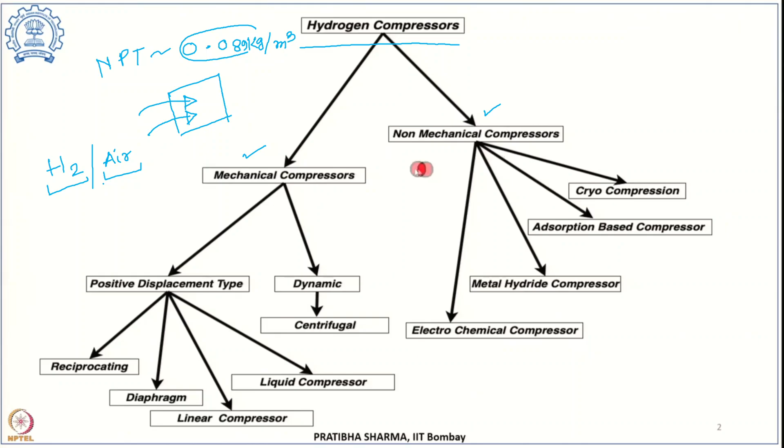There is a difference between the hydrogen compressor and air compressor. What are the main challenges between them? You know that air has a much higher density than hydrogen. Hydrogen has a very low density, while air has comparatively higher density.

And the diffusion rate of hydrogen is very high, while the diffusion rate of air is less compared to hydrogen. If the diffusion rate is very high for hydrogen, we have to take extra care for compressing it, because it should be properly sealed. Otherwise hydrogen can easily diffuse.

Rather, we will lose hydrogen. So we have to develop a totally sealed system, or hermetically sealed system, such that when you are developing a compressor unit like a positive displacement type reciprocating compressor, the material and all sealing components should be extra careful, such that no hydrogen leakage occurs. But air is easy to compress, and leaking of air is less than hydrogen.

And as you know, hydrogen is a very explosive gas. As we compress hydrogen, its temperature will be high, the pressure will be high, and correspondingly the temperature will be high. As it is a very explosive gas, the ignition probability is very high, that's why you should have extra care.

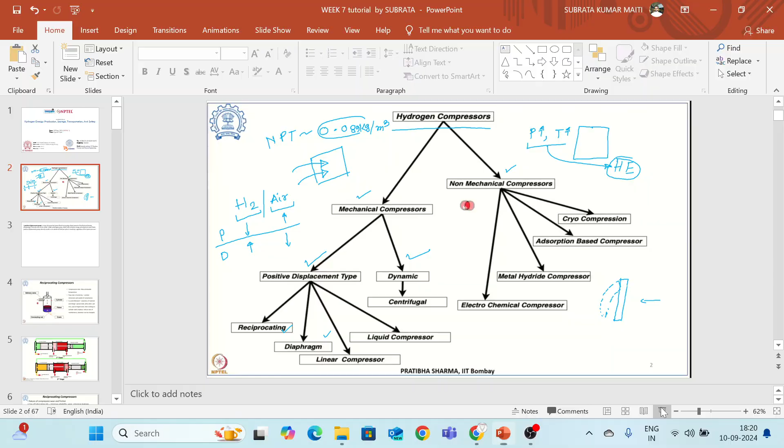Then coming to the, just wait, some other students... I always prefer the students to join at the proper time or scheduled time. Otherwise, it's a bit difficult to manage. Okay, anyway. Okay.

Next is the linear compressor. Some sort of advantages are there for the linear compressor. The reciprocating compressor is very noisy and a very vibrating system, and its compression efficiency is lower than the liquid compressor. And the contamination of oil, different sorts of oil used in the reciprocating compressor. Just to avoid these sorts of contaminations and avoid noise and vibrations, the linear compressor and liquid compressor have been developed.

Next is the dynamic compressor. Under the dynamic compressor, the centrifugal compressor. The centrifugal compressor is the same arrangement as the centrifugal pump, the pump used for taking the water from the ground floor to above. This is called a centrifugal pump. It is used for carrying the water from the ground floor to the first floor, second floor, third floor, or to the water tank kept up. This sort of centrifugal compressor is also used for hydrogen compression.

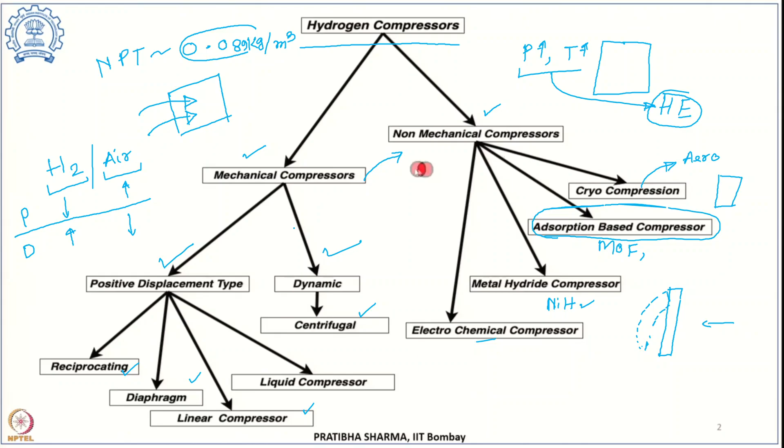Firstly, we will discuss the positive displacement type. Before coming to the positive displacement type, you should know some basic systems. I think most of you know the piston cylinder arrangement. This is the cylinder, and this is the piston, and this is the connecting rod.

And the connecting rod is connected with the crank and crankshaft. This is the crank. The crank has a rotary motion, and this connecting rod has a linear motion.

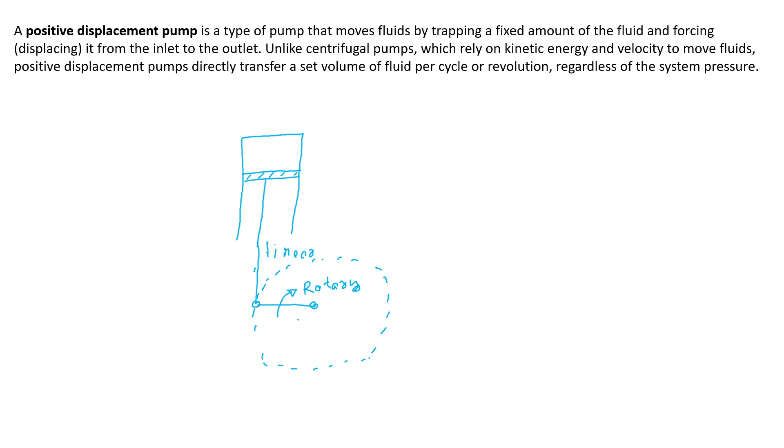And this is the center of the circle. Suppose in that path, the crank will rotate in the rotary motion. Okay. This is called crank, CRANK, crank. When the crank is rotating in this path, then this connecting rod, this is connecting rod.

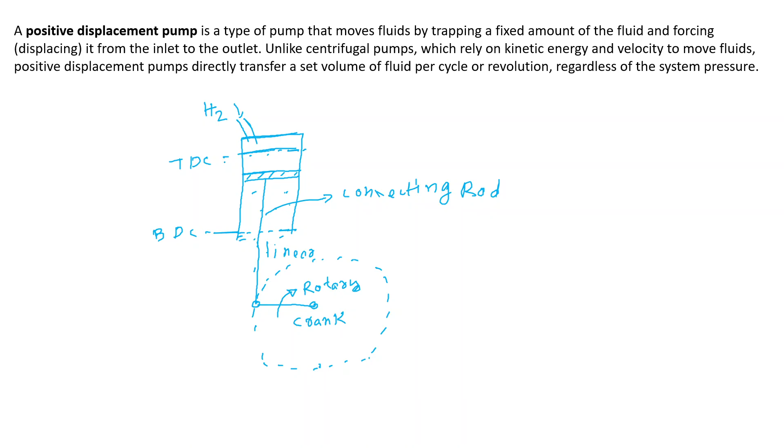When the piston comes to the bottom dead center in that position, the intake of the hydrogen will occur. That means when the piston comes to the bottom dead center, the hydrogen will be taken into the cylinder. The whole cylinder will be filled up with hydrogen gas. When the piston goes upward, it will come to the top dead center. The hydrogen gas will be compressed, and after that, the compressed hydrogen gas will go out.

This is the outlet of compressed hydrogen gas, or hydrogen gas with high pressure. Compressed gas with high pressure. This is why this is a positive displacement type thing. Anyone of you know why this is called positive displacement pump? Piston cylinder arrangement or reciprocating pump is called the positive displacement pump. Why? Because the answer is here.

What is the definition of the positive displacement pump? The positive displacement pump is a type of pump that moves fluid by trapping a fixed amount of fluid or displacing it from the inlet to the outlet. That means for each cycle some volume of hydrogen will be compressed. By adding a large number of cycles, a large amount of hydrogen will be compressed. One by one cycle, the hydrogen gas or air will be compressed. This sort of process is called positive displacement pump.

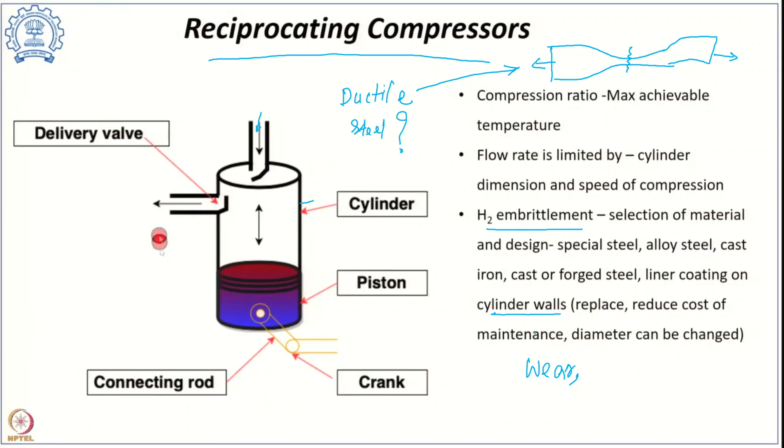Before coming to that part, I will discuss the connecting rod. This connecting rod has a linear motion. These two connecting rods are like this, in this way. My pen is somewhat disturbing.

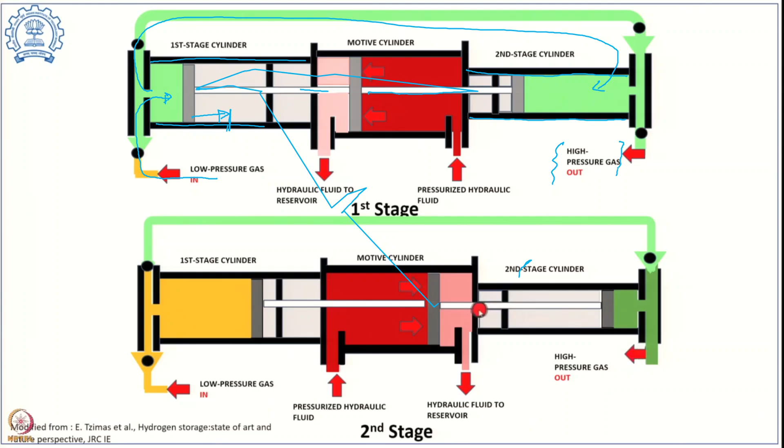The compressed hydrogen of the first stage cylinder will come to the second stage cylinder, and the second stage cylinder will produce higher pressure hydrogen gas, which will be stored for future applications. This is the way of multi-stage operation. In this way, a large number of cylinders can be accommodated for getting higher pressure or higher compressed hydrogen.

What are the challenges? Challenges we have already discussed: the nature of compression, wear and friction during the piston cylinder movement, as the piston is moving to and fro, up and downward. The wear and friction will corrode or erode the material, and the cylinder and the pistons will be damaged.

That's why lubrication or lubricating oil will be used to improve the reliability, minimize the wear and the leakage, and the life will be more. This is a very simple thing.

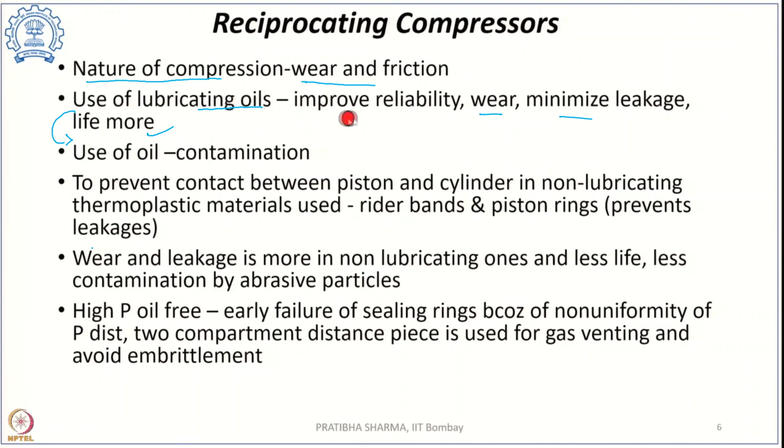The use of the oil has some disadvantages also, like contamination. If the oil contaminates the compressed hydrogen, you will get contaminated compressed hydrogen. For that you have to arrange another unit so that the oil can be removed from the compressed hydrogen. These sorts of challenges you have to take care of during hydrogen compression.

Here is some theory part. Wide range of capacity and flow rate, and the delivery pressure is very high. This reciprocating compressor has up to 1000 normal meter cube per hour flow rate. The company Hydropac has developed a compressor with a flow rate of 4820 normal meter cube per hour.

Hitachi Infrastructure is also a reciprocating compressor manufacturer. These are very simple things you can go through. These are the several challenges, like several moving parts associated with the reciprocating compressor.

So as a large number of moving parts are associated with the reciprocating compressor, the maintenance cost is very high. A large number of moving parts means that the complexity of the system is very high, so the maintenance cost is very high. And you have to arrange some cooling arrangement, since during compression the temperature will be high. That high heat should be extracted, otherwise this hydrogen can be explosive.

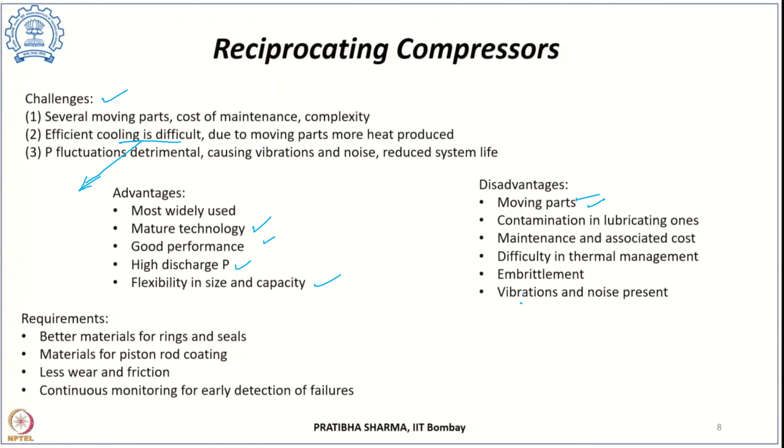And the thermal management, like arranging the heat exchanger, is very difficult, and embrittlement of the piston cylinder material is there. So to avoid embrittlement, you have to take care of the material design. And last but not least, vibration and noise are present in the reciprocating compressor. To minimize these vibrations and noise, and to eliminate the contamination of the oil, the diaphragm compressor has been developed.

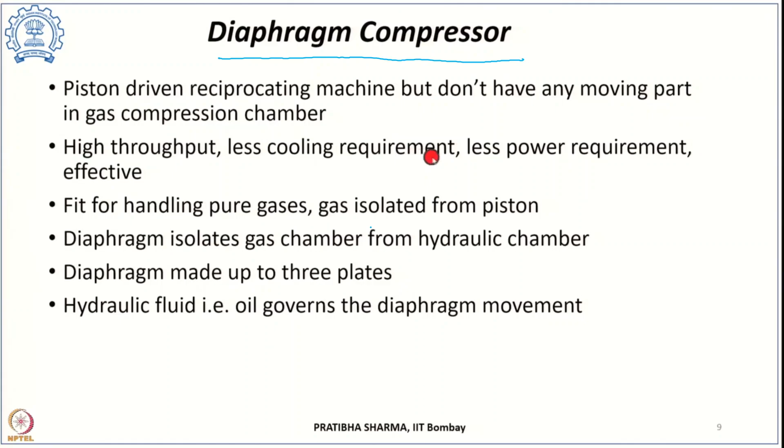This is simple. You can go through this slide; I will not go through it. I will come to the working principle of the diaphragm compressor. Okay. What are the advantages of the diaphragm compressor? The diaphragm compressor is an oil-free hydrogen compressor. You get oil-free, lubricant-free compressed hydrogen gas. There is no oil contamination in the hydrogen.

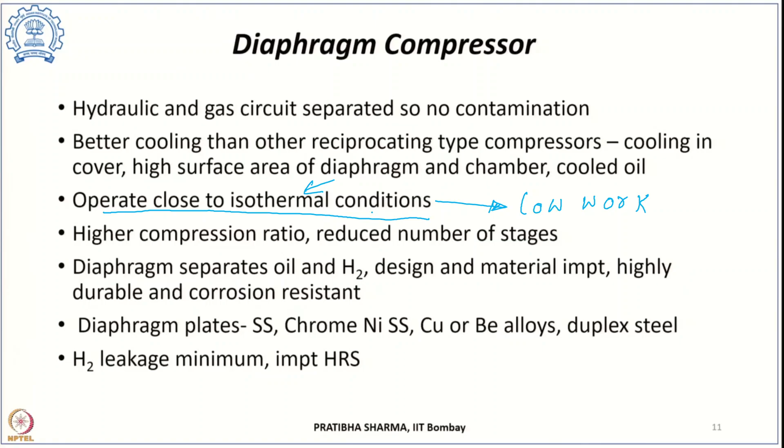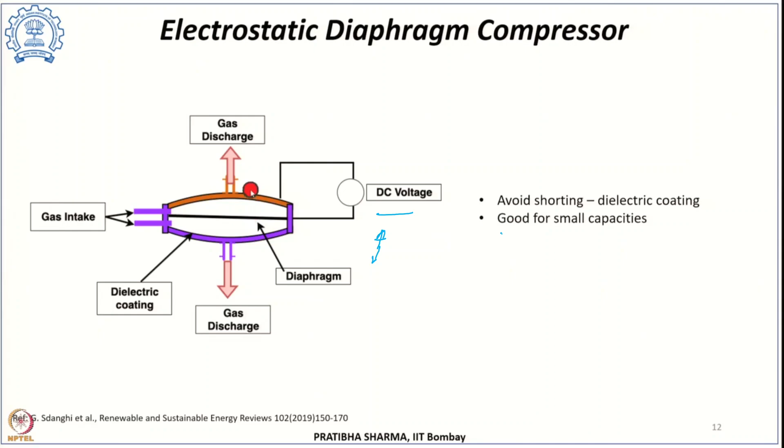This is the electrostatic diaphragm compressor. There the DC voltage is used just to give the to and fro motions to the diaphragm. That's why it is called the electrostatic diaphragm compressor. Okay, this is good for small capacity or small scale industry, or small amounts of hydrogen compression.

There are some advantages. It has high efficiency, it is very compact, high throughput, lower power consumption, less cooling requirement, and fit for handling pure gases, as there is no contamination with the oil. Some disadvantages also: the failure of the diaphragm, so the diaphragm material should be taken into consideration. Complexity is a little bit higher, and there are flow rate limitations; the flow rate is not so high, but the flow rate is high for the reciprocating compressor.

Some sort of status here you can go through. These are the companies producing this sort of compressor, 4 to 28 megapascal, and flow rate is 5 to 581 normal meter cube per hour.

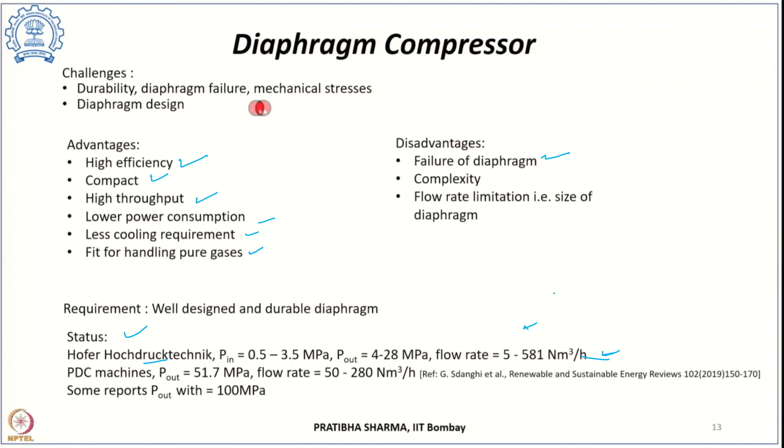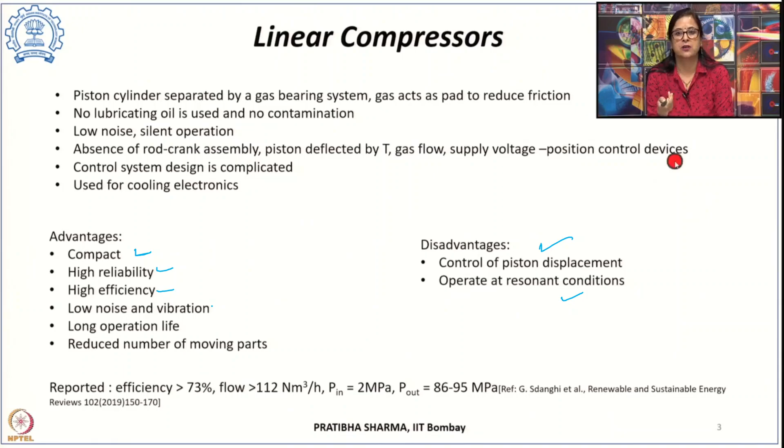We have to employ a large number of sensors, such that they can sense temperature and pressure of the gas, and according to this the magnet positions will be fixed. The control of the piston displacement operating at resonant conditions; these are the main disadvantages. The advantages: it is very compact, high reliability, high efficiency, low noise and vibrations because of the spring arrangement systems, and long operation life.

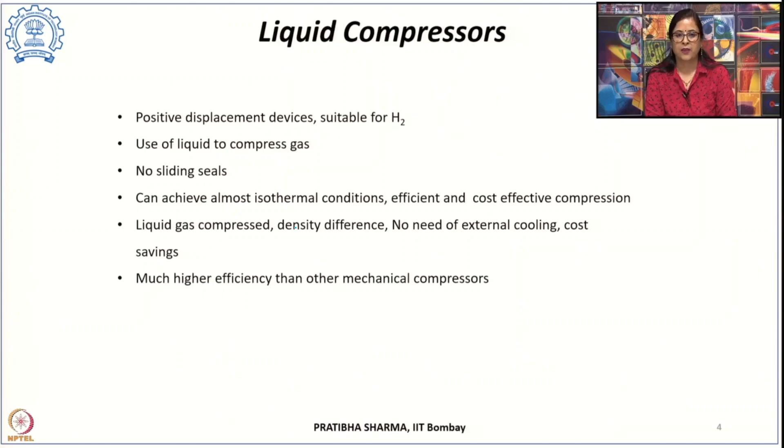Next, the liquid compressor. The liquid compressor also compresses using a positive displacement device. These are the very basic things you can go through. Now coming to the working principle of liquid compression. Generally, the word liquid compression is a little confusing. Why is the word a little confusing? Because suppose liquid means you take water. Is it possible to compress water? Can you compress the water? No.

Sometimes, during solving fluid mechanics problems, we assume water as an incompressible fluid. We have solved different numericals assuming water as an incompressible fluid. But water also can be compressed at a very low level. All liquids can be compressible at a low level. So liquid hydrogen also can be compressed.

Here, two piston cylinder arrangements are there. At the inlet, a liquid pump is used. This pumping liquid is another liquid. This piston will initially go downward, the hydrogen inlet will come, and the compressed hydrogen will go to the next cylinder, where further compression is done, and we will get higher compressed hydrogen.

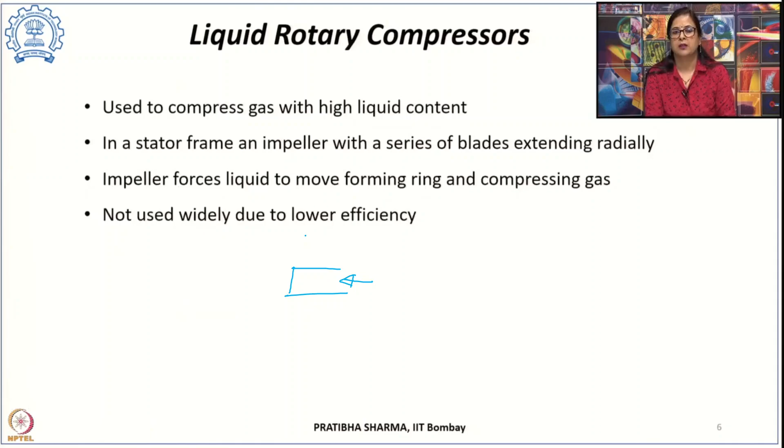This is the liquid rotary compressor, used to compress gas with high liquid content. In the piston cylinder or reciprocating compressor, a fixed amount of gas is compressed, but in the rotary compressor, a larger amount of gas will be compressed, or at a continuous stage.

Then the ionic liquid compressor. In place of liquid, here we will use the ionic liquid. What are the advantages of the ionic liquid?

Because the ionic liquid has a low melting point, low melting point means low vapor pressure. If the low vapor pressure of such liquid is used for compressing the hydrogen gas, the loss of the liquid will be very less.

Loss of the liquid will be very less means that during the continuous operations or long term operations, as the vapor pressure is low for the ionic liquid, it will not evaporate easily. If the vapor pressure is low, it will not easily evaporate, which means the loss of the liquid will be less.

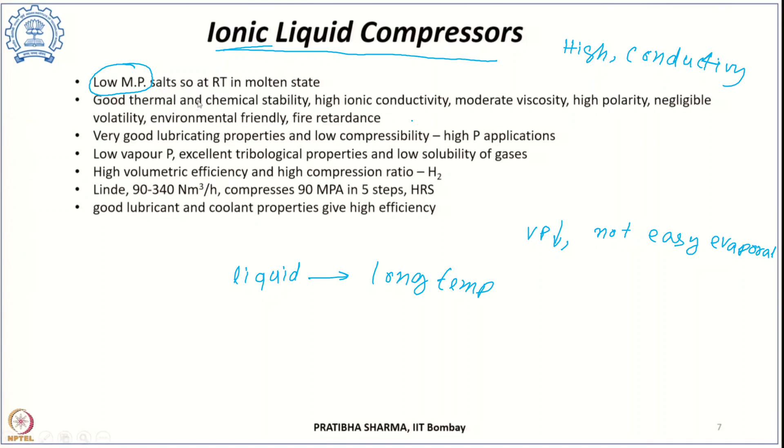No contaminations - these are the advantages you can go through. The main disadvantage of this ionic liquid is the corrosion is very high, because as ionic liquid conditions are used, it can chemically corrode the systems. So corrosion is very high, and you have to take care of the material design for the ionic liquid compression.

And cavitation phenomena - these are the main things. Summary you can go through.

Next is the cryogenic compression. Cryogenic means low temperature. Sometimes at low temperature, the state will be liquid.

The liquid hydrogen at cryogenic conditions, means at very low temperature at 77 Kelvin, the hydrogen will be at liquid state. This liquid hydrogen will be delivered through the cryogenic pump to the evaporator.

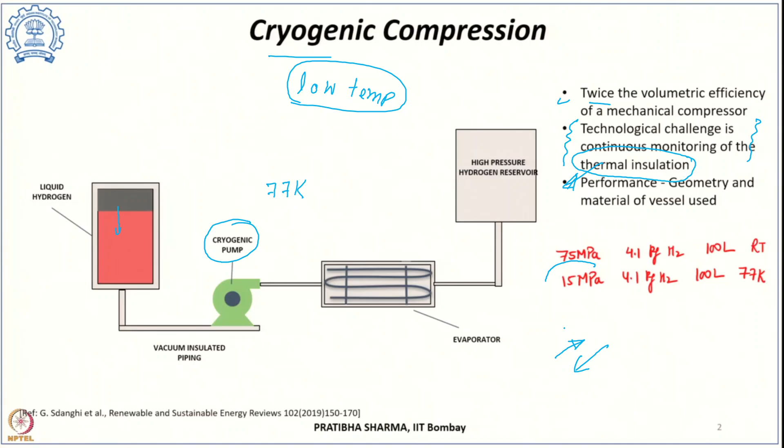The technological challenge is continuous monitoring of the thermal insulation. The working principle of this cryogenic compressor is thermal arrangement - sometimes heat is absorbed, sometimes heat is released. In this process, the cryogenic compression works.

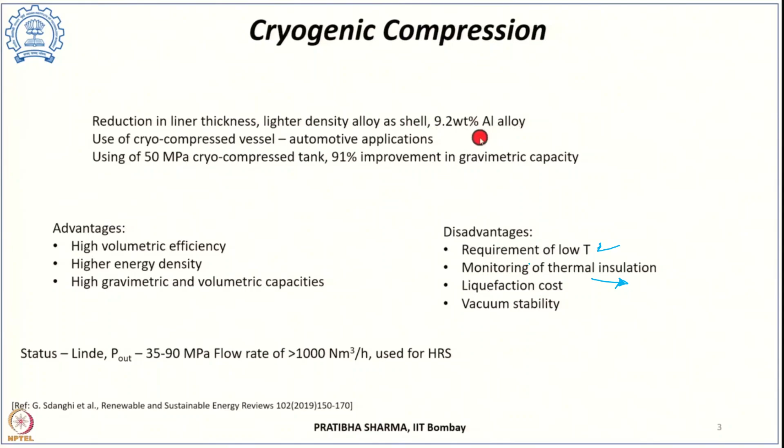It requires low temperature. Just to maintain or create this low temperature, you have to pay a higher amount of money, so the maintenance is very high - monitoring the thermal insulation, as the working principle is on the thermal basis. So proper thermal insulation should be there.

Next is the metal hydride compressor. I am getting very late, so I'll go in very speed.

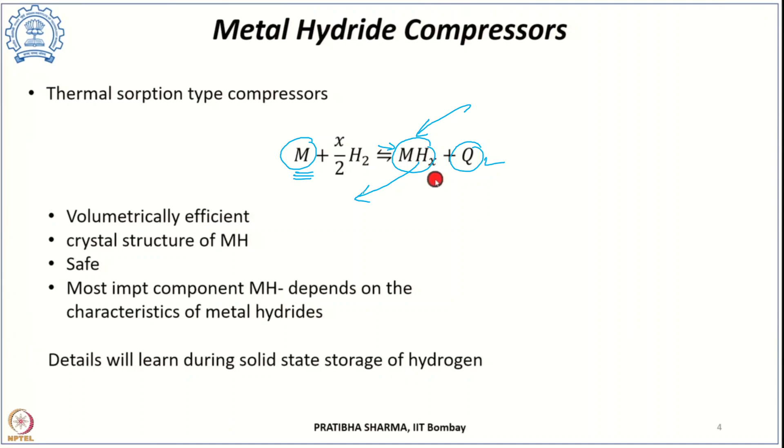Metal hydride compressor - suppose nickel, any sort of metal will react with the hydrogen and form metal hydride, meaning the hydrogen is storing inside the metal interstitial. During the forward reaction, heat is produced, meaning this is an exothermic process. During the releasing of the hydrogen from the metal, the backward reaction is endothermic, meaning you have to give some heat just to remove the hydrogen from the metal. This is the fundamental principle or fundamental reaction.

And some conditions are written here.

And this is metal hydride, with the TS diagram of this. One thing - what is the meaning of high reversibility?

High reversibility - reversibility means the amount of gas absorbed by the metal, and how much during the reversible process we can recover exactly from that. Suppose this is metal, I am adding hydrogen, the hydrogen is reacting with the metal, this is forming the metal hydride. Whatever amount of hydrogen is absorbed inside the metal, that full amount of hydrogen should be released during the endothermic reaction process, or when we add some heat to the material, the same amount of hydrogen will go out. So this is the reversibility.

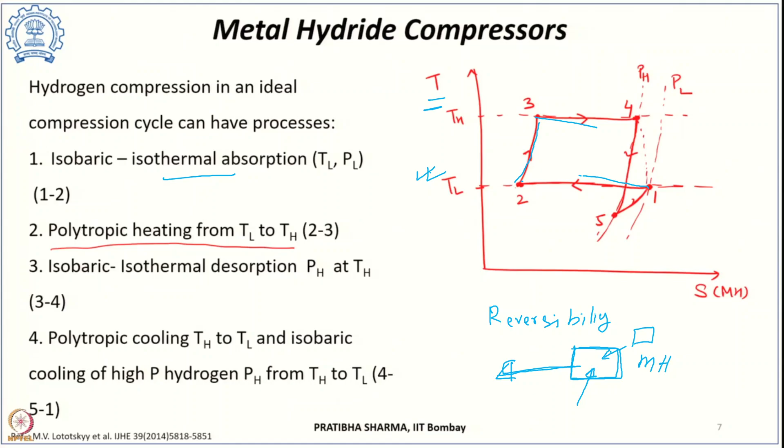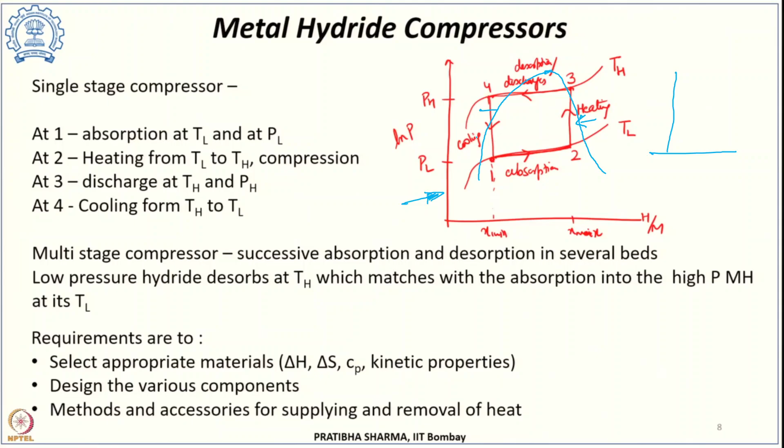Sir, this metal hydride storage system - are these already in use, or is this still in laboratory stage? This is still in the laboratory scale, not commercialized yet. But in research laboratories, researchers are working on this metal hydride. This is already an established technology, established process, already at lab scale, established technology, established process. A patent already exists, but this is not used commercially at large scale in industry applications.

I have seen that two or three industries in the world - two industries, one in the USA and another one I don't remember - are developing this metal hydride storage compression systems. They are also advertising this sort of arrangement for selling purposes. They are not largely applied, largely not used, but commercially you can get it. But in India there is no such industry. The metal hydride storage bed systems are usually used on cylinders.

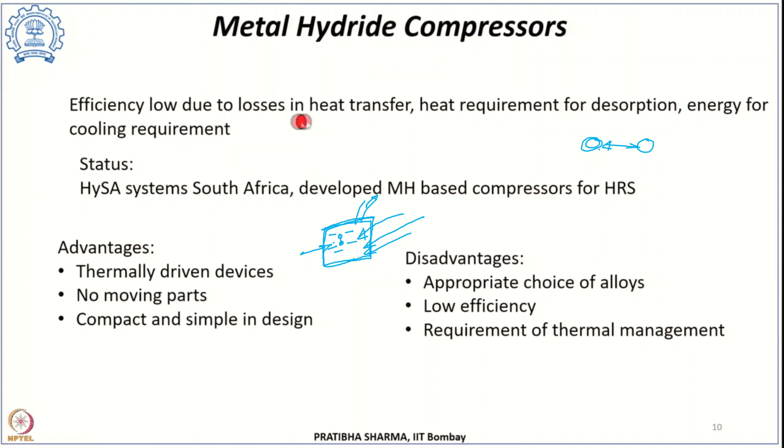This is the membrane, a polymeric membrane. Suppose this is a polysulfone polymeric membrane, or you could use a PEEK (polyether ether ketone) membrane, or an amide-based polymeric membrane, or a cellulose-based membrane.

Here, the anode is positive and the cathode is negative. At the anode, you give low pressure hydrogen, and oxidation and reduction reactions will occur there.

The hydrogen will come, low pressure hydrogen will come in the anode side, this side. The oxidation reactions will be there, and it will form the H+, and this H+ moves through the membrane. This is called the cation exchange membrane. In a cation exchange membrane, only the cation will pass, H+ will pass, and this H+ will

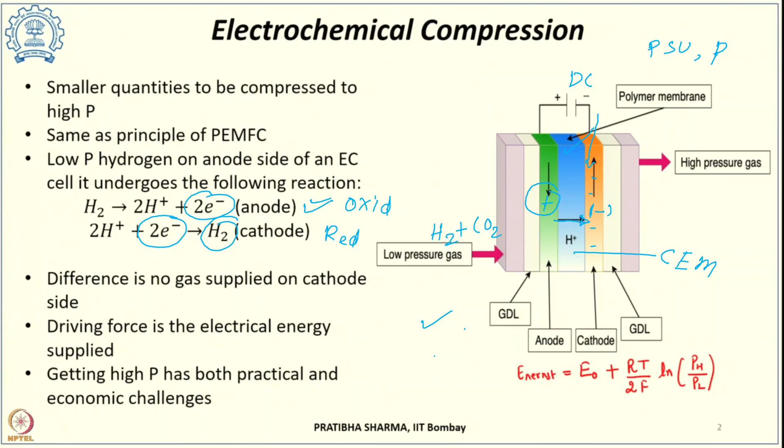If the membrane is very weak, the high pressure compressed hydrogen gas can break this membrane, or the membrane or system can be damaged, so it should be mechanically strong. This is the basic working principle. The advantages and disadvantages you can go through by yourself.

So the basic principle is that in the porosity of the material, the hydrogen will be trapped, and a higher amount of hydrogen will be trapped, so it will be compressed. This sort of technology can be used for compressed hydrogen as well as storage of hydrogen for future applications. These are the comparisons you can go through.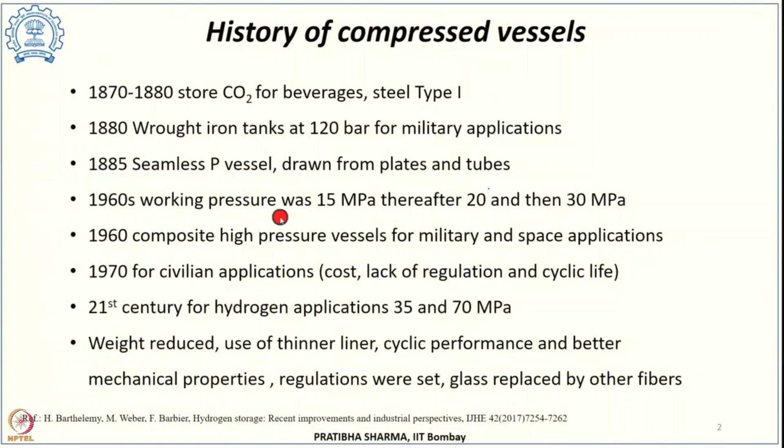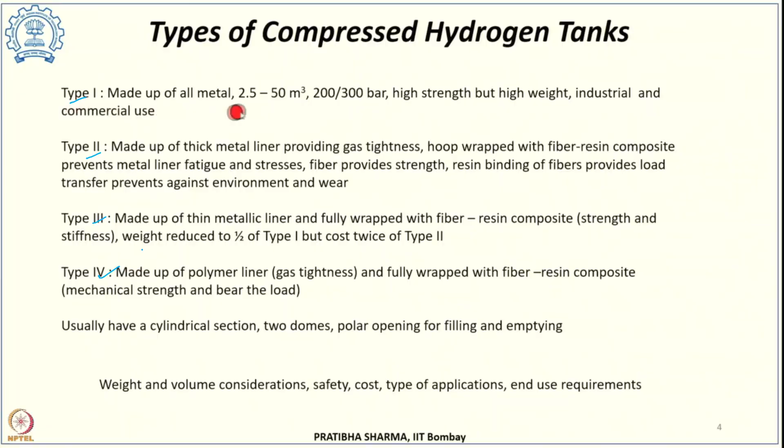This is the history of the compressed vessels. I will come to the compressed vessel, the basic things. Types of compressed hydrogen tank: type 1, type 2, type 3. This is the development of the types of compressed hydrogen tank. This is important. The first type compressed hydrogen tank.

This is the liner. This is the outer shell. The outer shell is called the liner. This is made of metal. If compressed or higher pressure hydrogen is stored in the type 1 tank, it cannot go beyond a certain limit.

But if we design using some composite fiber resin in the hoop region, I mean by applying some sort of composite structure, the stability of the tank will be high, such that we can accommodate higher pressure hydrogen.

In that way, the type 4 tank has a polymeric liner. In the previous three types, there was a metallic liner. In this case, there is the polymeric liner, and outside the liner the composite fiber is placed such that more and more compressed hydrogen can be stored.

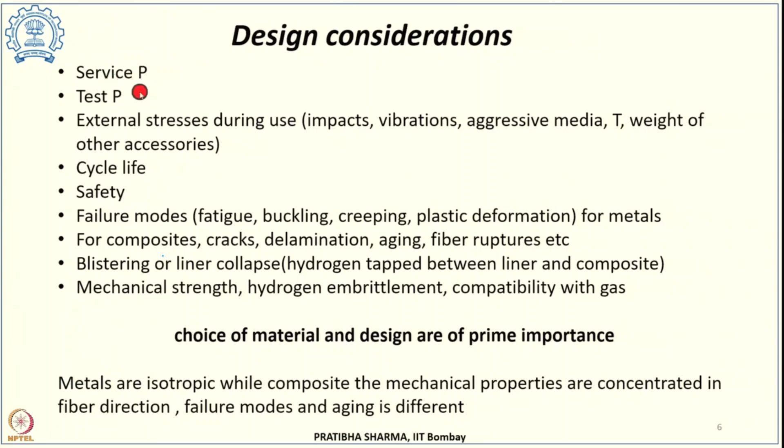These are the design considerations: as higher pressure hydrogen is stored, the material should withstand higher pressure and higher temperature, and the cycle life should be high. Failure should be avoided. Such a material should be used. What materials can you use? Metallic, AL6061; polymer, polyethylene, polyamide; and composite, aramid. This aramid structure has very high strength.

Aramid structure, you can Google it. Aramid structure has 100 times higher strength than steel. You can go through Google. Aramid structure is very good. And nowadays carbon fiber is used for making the composite, for high strength.

This is not actually alloy. Okay. And this is not actually alloy. Or you can go through the internet. Okay, I mean, okay. Aluminium, I'll see.

Aluminium has a very high strength as well as a lower weight. That's why aluminium is used for aerospace applications. Okay. Means specific strength should be considered during the design time.

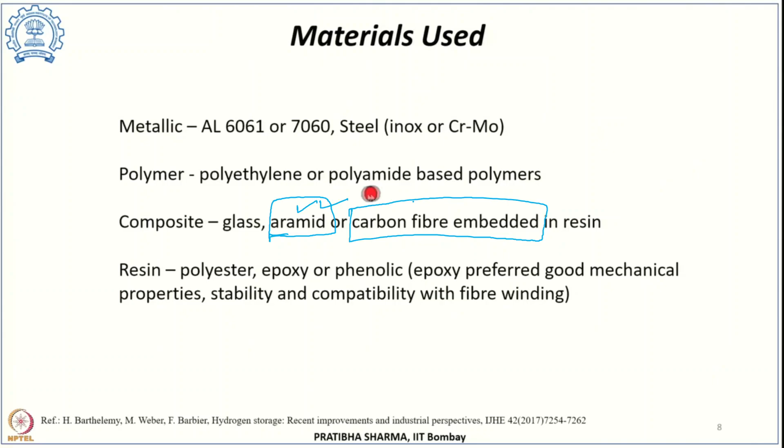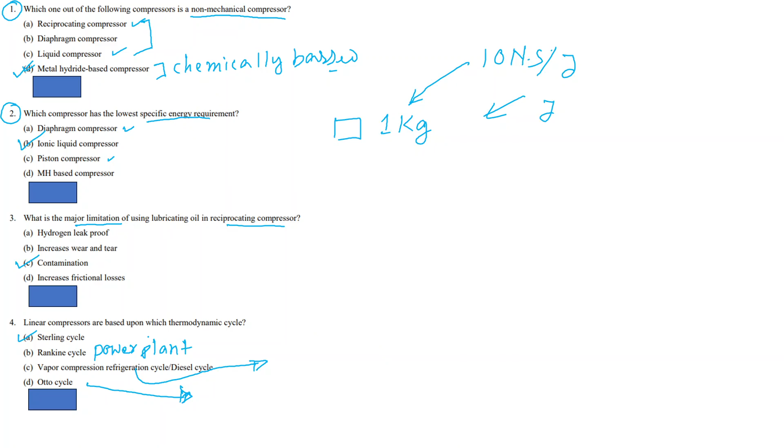for IC engines: the Otto cycle is for the petrol engine, and the diesel cycle is for the diesel engine. The Stirling cycle is used for the thermodynamics based linear compression.

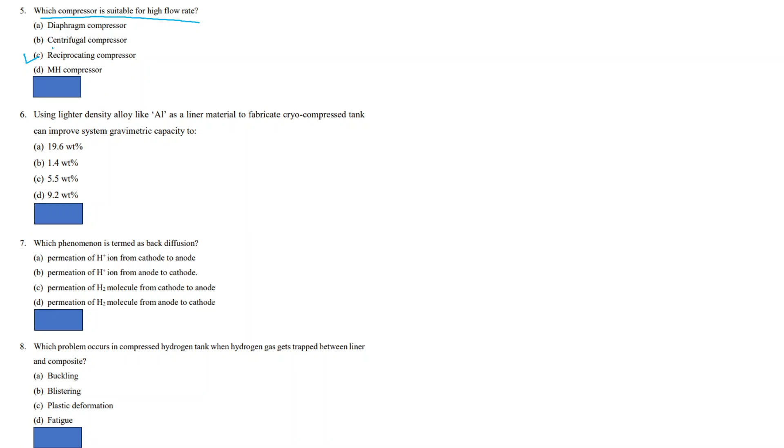Question number 5: which compressor is suitable for high flow rate? It's the reciprocating compressor. High flow rate means 1,000 or 10,000 normal meter cube per hour. This is a very high amount, because of the very frequent up and down cyclic motions, so a high volume can be generated per hour. Next one is question number 6.

This is also a remember type question. Lighter density alloy like alumina, alloy like aluminium, as liner material to fabricate a cryo-compressed tank can improve the system gravimetric capacity. This is a remembering type question. You have to answer 9.2. Yeah, 9.2. This is very high.

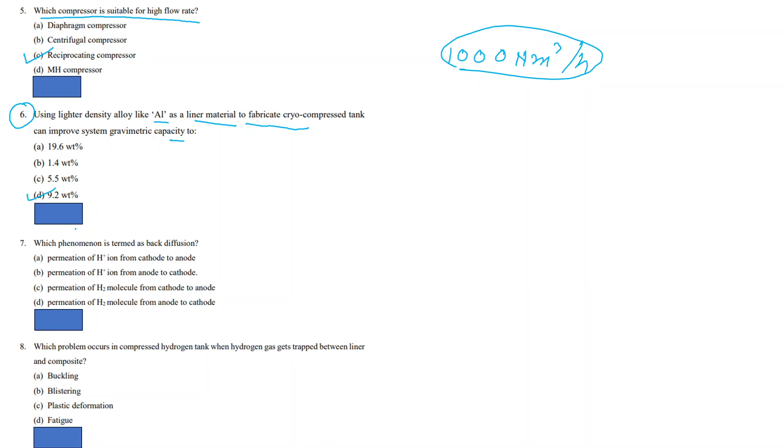Okay, question number 7. Which phenomenon is termed as back diffusion? Back diffusion is very important. Permeation of H plus ion from cathode to anode, permeation of hydrogen ion from anode to cathode, permeation of hydrogen molecules from cathode to anode, permeation of hydrogen molecules from anode to cathode. I think the first one. A, first one. How is the first one right? Just draw the diagram.

Because in the PEMFC, permeation means when it comes back from the cathode to anode. This is the cathode position. The working principle is this one: H plus will go from anode to cathode. Here is the H plus ion. If the H plus ion is in this direction, this is the reverse direction. So it is called back diffusion, the back diffusion of the ion.

Question number 8. Which problem occurs in a compressed hydrogen tank when hydrogen gas gets trapped between the liner and the composite? Blistering. Buckling is like, suppose in your home, this is the column. Suppose on your roof weight is there; the column can buckle like this. This is buckling failure. It will bend in the horizontal direction. This is called buckling.

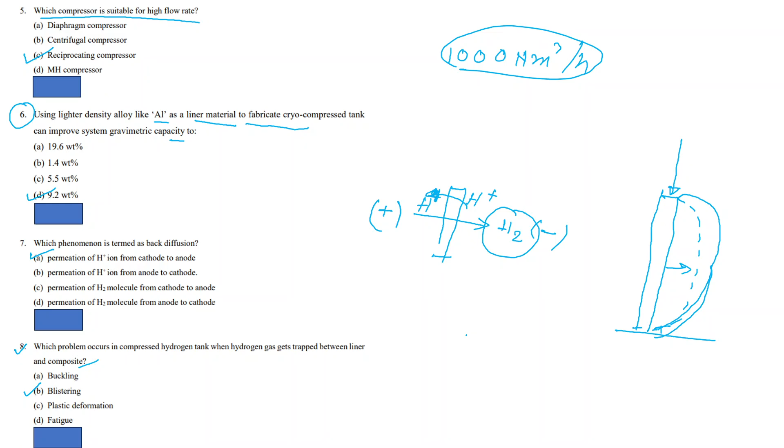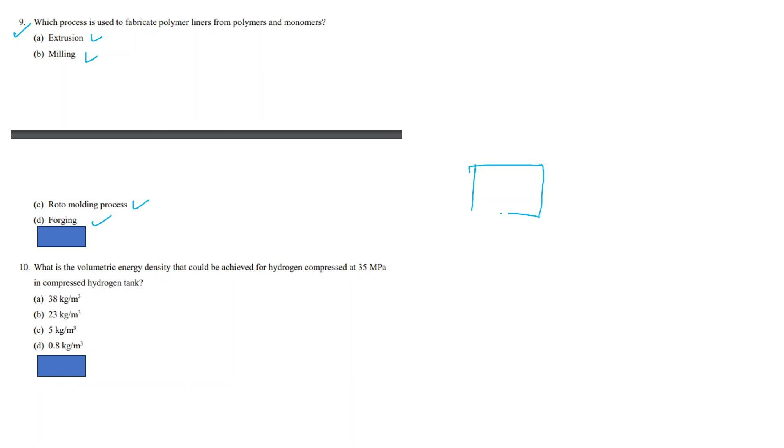Question number 9. Which process is used to fabricate a polymer liner from polymers and monomers? The extrusion process, milling process, roto-molding process, and forging process. What is the forging process? Suppose iron metal is here. Blacksmiths use the forging process: you heat the iron and you can shape it into different shapes. Roto-molding is a rotating part with the molding process. Milling process, yes, gear manufacturing is the milling process.

Extrusion process is, suppose you are taking the Colgate or toothpaste. You are pressing at the back side of the toothpaste, and a cylindrical shape of the toothpaste is coming out. This is the extrusion process. Am I right? Yes. So answer C is correct for question number 9.

And question number 10. What is the volumetric energy density that could be achieved for hydrogen compressed at 35 megapascal? 23. How can you get 23? With the formula, PV equals nRT. You have to solve it. So how can we solve for 35 megapascal? This is an important numerical. Final pressure is 35 megapascal.

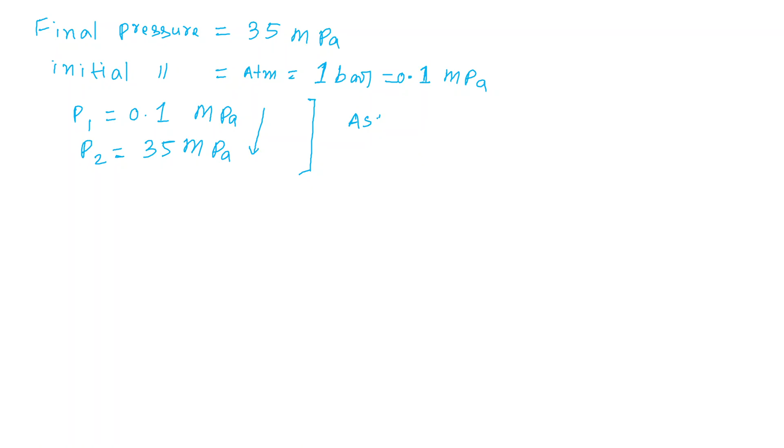First, we will use the ideal gas equation. I am compressing the hydrogen. Is it an ideal process? No, it is a real process. But during calculation we always use the ideal gas equation, assuming this is an ideal process. What is the ideal gas equation? The famous PV equals nRT. P equals pressure, V equals volume, n equals number of moles.

So n equals the number of moles. If you see one numerical, you can get habituated with numerical solving. Number of moles: how can you calculate the number of moles of any given gas? Suppose I am giving you 10 kg of hydrogen gas. In the first class, 2 grams of hydrogen, exactly, the gram molecular mass, is 1 mole. 2 gram, 1 mole.

So we can get the number of moles by converting: total mass 10,000 divided by 2. So 5,000 moles. Total mass divided by the molar mass. We'll write the total mass as small m, and the molar mass is capital M. Molar mass for hydrogen is 2 grams. Okay, this is the number of moles. Here n is the number of moles.

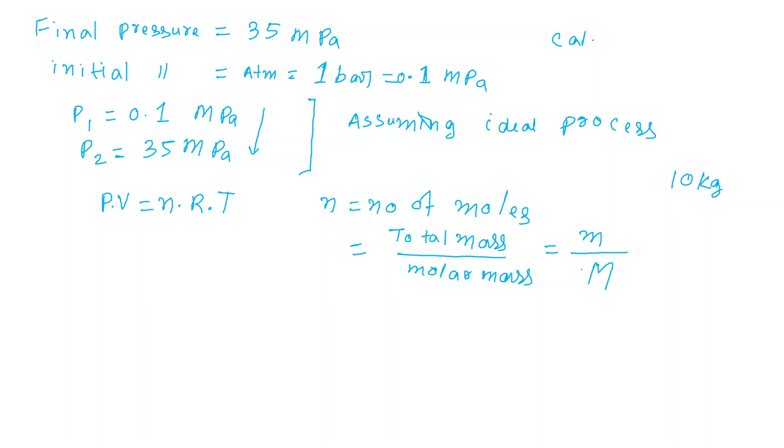Okay, so our final objective is the density. Actually, what is the density? Here you have to calculate the density, because kg per meter cube is the density. So we can use the total mass. So rho equal to m by V is the density. I am coming to that part. I am deriving this formula from the starting point.

So PV equals small m over capital M times RT, where m is the mass, capital M is the molar mass, R is the universal gas constant, and T is the temperature. You have to calculate the density. Density equals m by V. So you can write pressure P equals small m by V into RT divided by capital M. m by V, mass upon volume, this is our density.

So the formula: pressure equals density, which I'll write as rho, multiplied by RT divided by molar mass. So what is the density? Density rho equals P into capital M divided by RT. This is our formula. So put all the values in the formula.

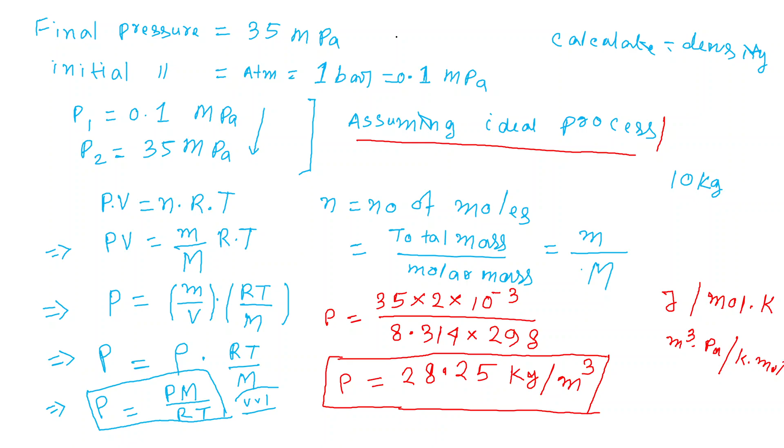We have assumed ideal gas conditions, but you have to take into consideration that these are real conditions. If you consider the real conditions, what will happen? Density will be less. In the real gas, what terminology are we using? Do you remember? Compressibility factor, capital Z. The compressibility factor formula was mass of ideal divided by mass of real.

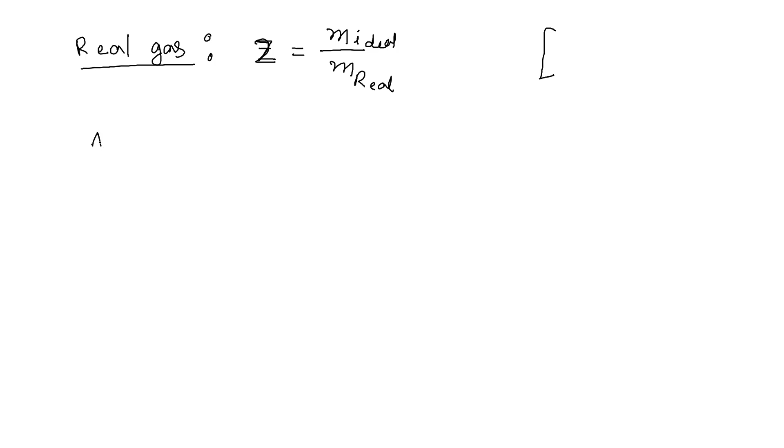Always, for the real gas, the density is less. You can also remember: the ideal gas has a higher density, and the real gas has a little less density at the same conditions. Here no Z value, no compressibility factor, is given. So you can assume the compressibility factor Z. Generally we assume compressibility factor 1.2.

So you can assume the compressibility factor Z equals 1.2. So 1.2 equals the density of the ideal gas divided by the density of the real gas. So the density of the real gas will be the density of the ideal gas divided by 1.2.

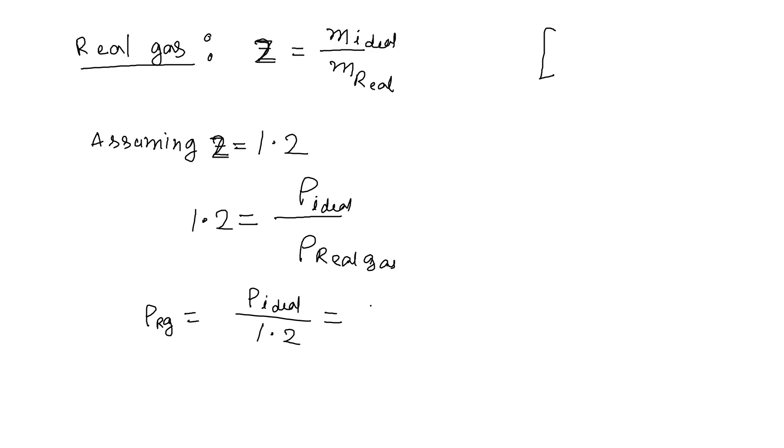It was 28 point something, 28.25. 28.25 divided by 1.2 will come around 23.54 kg per meter cube. This is your answer. So our option is near 23. You can also remember the value, but I am not going into remembering the value; I am going for the calculation part, how it can be calculated.

At different compression levels, the compressibility factor will be considered different. You cannot take the same compressibility factor at high compression systems like 700 bar, 500 bar. At that time you have to take a higher compressibility factor, greater than 2, 3, 4, 5, 7, like this. In some thermodynamics numerical questions, you will find that sometimes the compressibility factor is 2.7. That means this is working at very high compression systems.

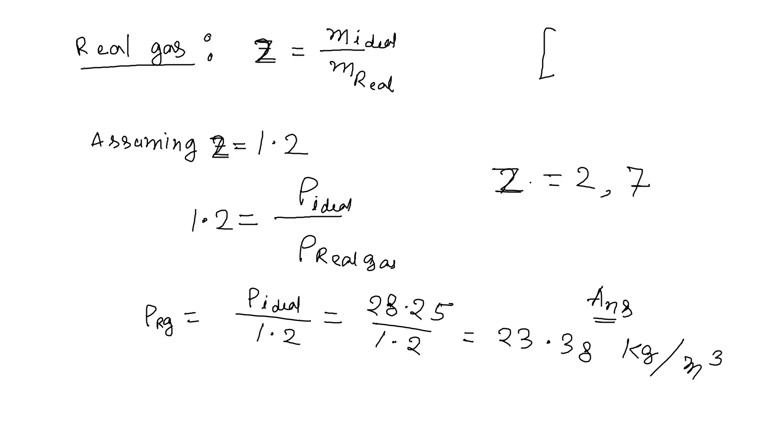Okay, I think this numerical is understandable to you. Next, you have to remember some density values for different calculations at NTP conditions. At NTP condition, what is the density of hydrogen gas? 0.089. You have to remember this value, in kg per meter cube.

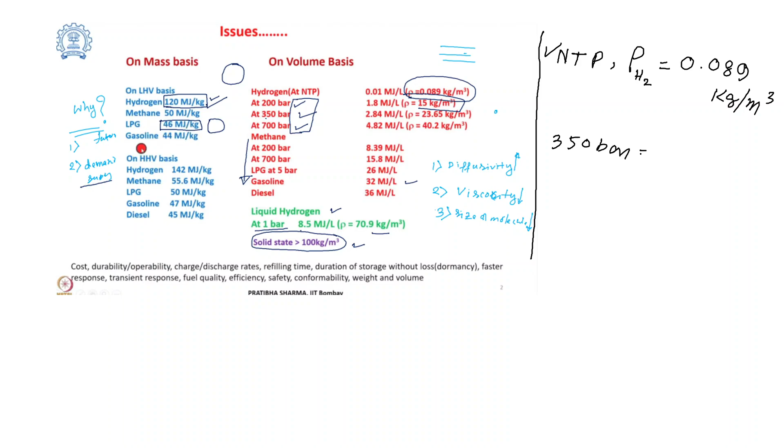And at 200 bar, in numericals, this value you have to remember. But in some numericals you have to assume: at 350 bar, the density of hydrogen is 23.65, and at 700 bar, the density of hydrogen is 40.2. By assuming these densities, we will solve one numerical.

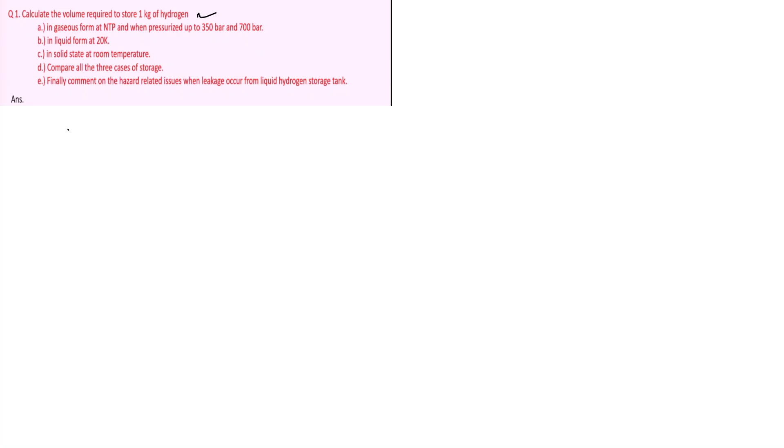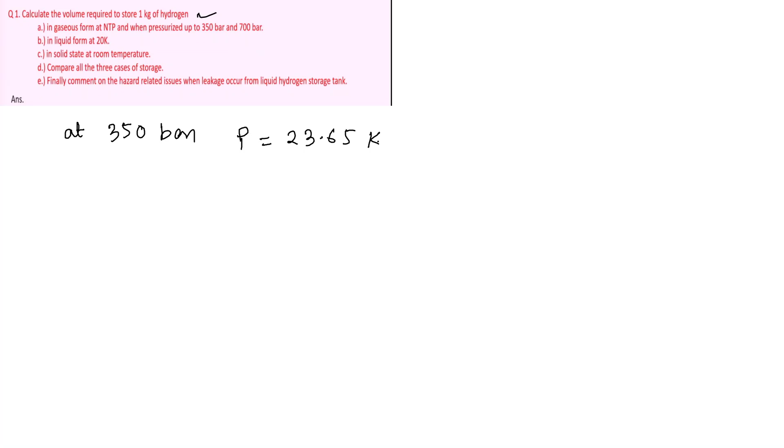Calculate the volume required to store 1 kg of hydrogen in the gaseous form at NTP, and when pressurized up to 350 bar and 700 bar. So at 350 bar, what is the density of hydrogen? 23.65 kg per meter cube. The density formula is m by v. So what is the volume? The question is the volume of 1 kg of hydrogen at 350 bar.

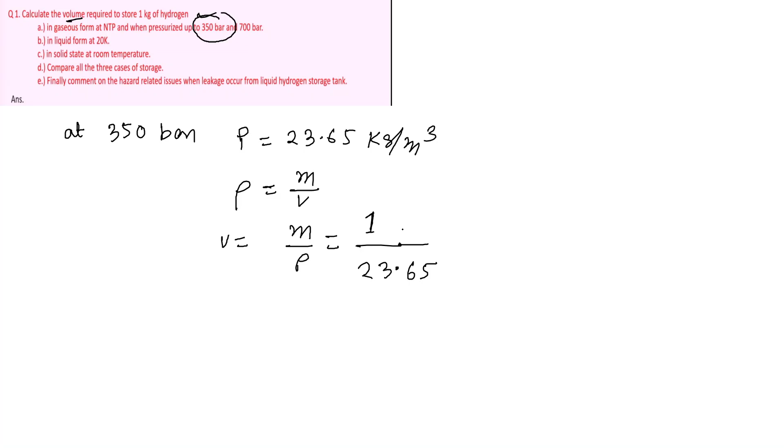So you can find the volume: v equals m by density. m equals 1 kg, the SI unit, and density is 23.65. The volume will be in meter cube, or if you want to convert meter cube to liter, you have to multiply by 1000. 1 meter cube equals 1000 liters. You can calculate this value at 350 bar. Similarly, you can calculate it at 700 bar.

And in the liquid form at 20 Kelvin, what is the density of hydrogen? You have to remember the liquid hydrogen density, because at 1 bar the liquid hydrogen density is 70.9 kg per meter cube. Because you are a student of hydrogen generation, compression, storage and transportation, you have to remember the liquid hydrogen density at atmospheric conditions. Similarly, you can calculate the volume of hydrogen. This will be at a specific temperature, correct?

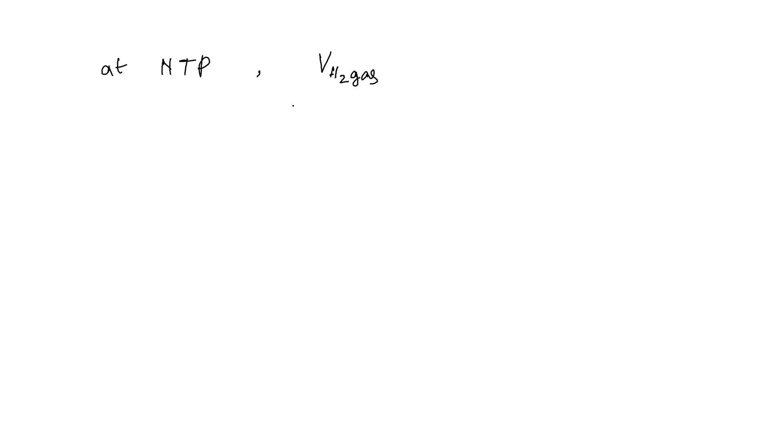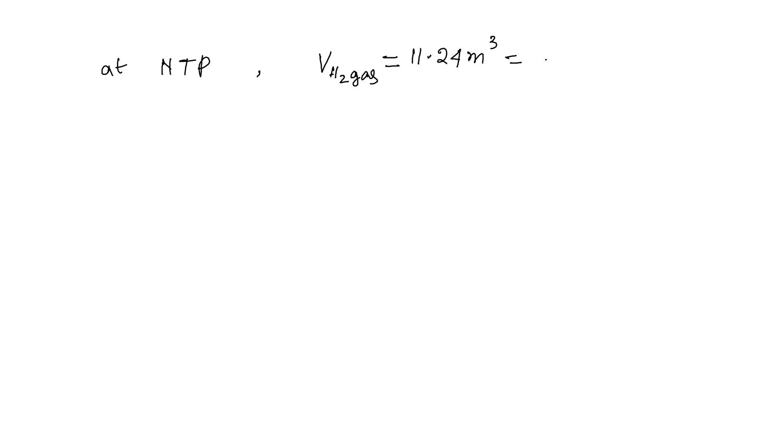The total volume of hydrogen gas at NTP will be some value - I have already calculated it. V will be 11.24 meter cube. 11.24 meter cube means how much liter? It is 11240 liters at NTP.

If you calculate the value at 350 bar, the volume of the hydrogen gas comes out to be 0.042 meter cube, which means 42 liters. If you calculate the volume of hydrogen at 700 bar...

The volume of the hydrogen gas at 700 bar is coming out to be 0.025 meter cube, which means 25 liters.

At liquid state, suppose if you calculate the volume of hydrogen, the value will come to 0.014 meter cube, that means 14 liters.

For the solid case, yes, sir, correct - finishing it. For the solid case, the total volume requirement or occupied volume of hydrogen - sorry, I have taken some wrong data. For the solid case it should be 0.01 meter cube. If we calculate it, you can get this will be 10 liter, and this will be like 14 liter.

So you can see, the main motto was that hydrogen should be compressed at solid state or liquid state such that it fits in the cylinder. So for hydrogen gas at NTP conditions, for storing 1 kg of hydrogen, you have to require this much liter of tank. This is a very large amount of tank. Is it possible to make such a large liter content tank?

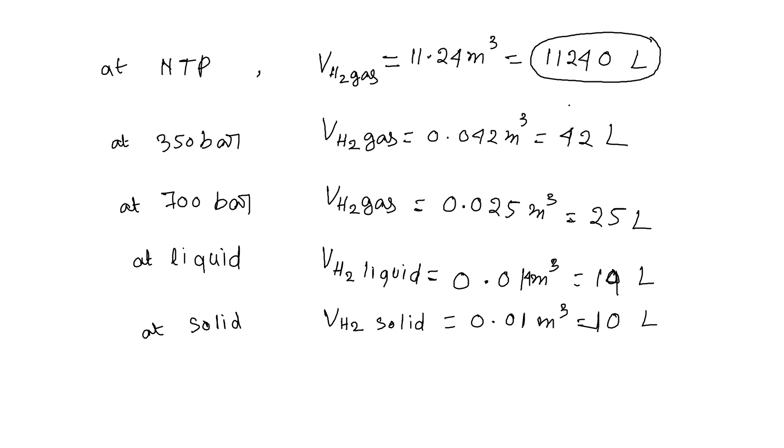Is it possible just for 1 kg of hydrogen, 42 liter of tank? Suppose in your motorcycle you keep 5 kg of hydrogen at a time. For that 5 kg of hydrogen, you'd have to make a 200 liter tank. Is that possible? No.

So this is also very high actually, and this is somewhat acceptable, 25 liter, but this is also high. But somehow acceptable. So for storing 1 kg of hydrogen...

At higher pressure, if we increase the pressure, the volume for storing 1 kg of hydrogen is reducing, or container volume is reducing. So hydrogen should be stored in a compressed manner.

For storing liquid hydrogen, only a 14 liter tank can store 1 kg of hydrogen, or a 10 liter fuel tank can store 1 kg of hydrogen. Okay, this is our main comment.

This is all about today's lecture, and we'll meet in the next one. I think another part of this last question remains.

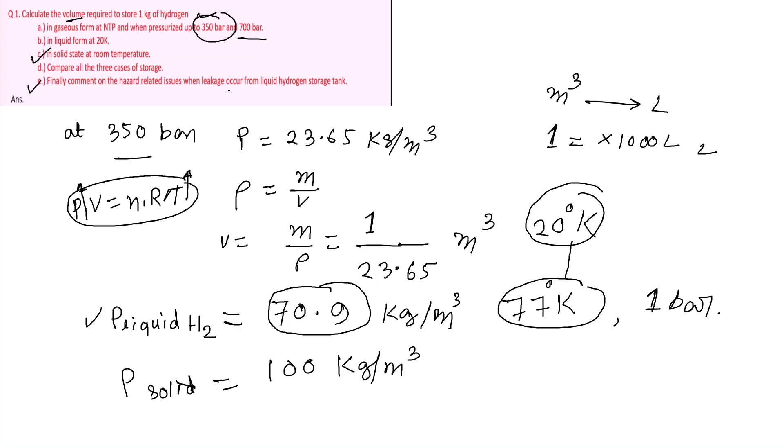Final comment. Final comment on the hazard related issue when leakage occurs from the liquid hydrogen storage tank.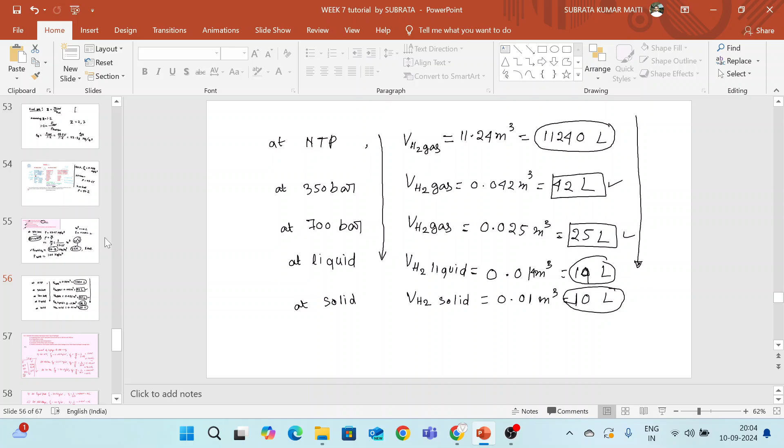Suppose I have to make one extra slide. The question is asking, this is very interesting and important for understanding, if the hydrogen gas is storing in a liquid condition.

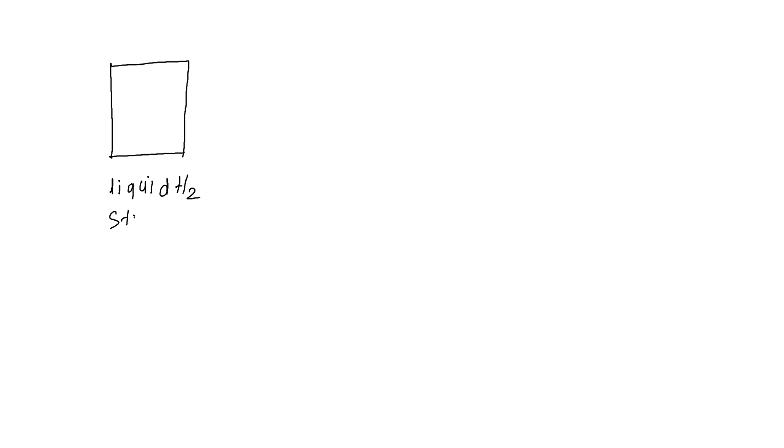Suppose this is a liquid storage hydrogen tank. Suppose liquid is stored at 77 Kelvin, a very low minus degree centigrade temperature. Suppose this liquid hydrogen, if leakage takes place...

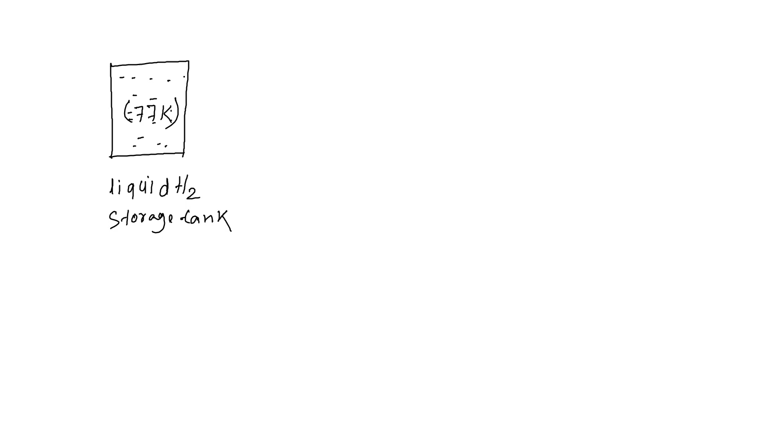Suppose this is atmosphere, ATM conditions. If this hydrogen gas leaks from the storage tank, what will happen? This is your question. What will happen?

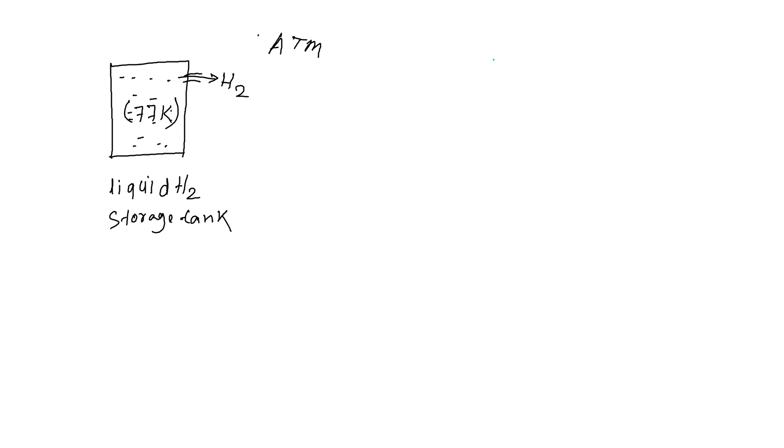One effect I can understand is that there will be some Joule-Thomson effect near the leak point, because it goes from high pressure to low pressure, causing expansion. Exactly, expansion will happen. So Joule-Thomson effect will occur, so a throttling process will occur actually.

So in this process, ice will form outside the tank near the leak, going from high pressure to low pressure, and the expansion will be very high.

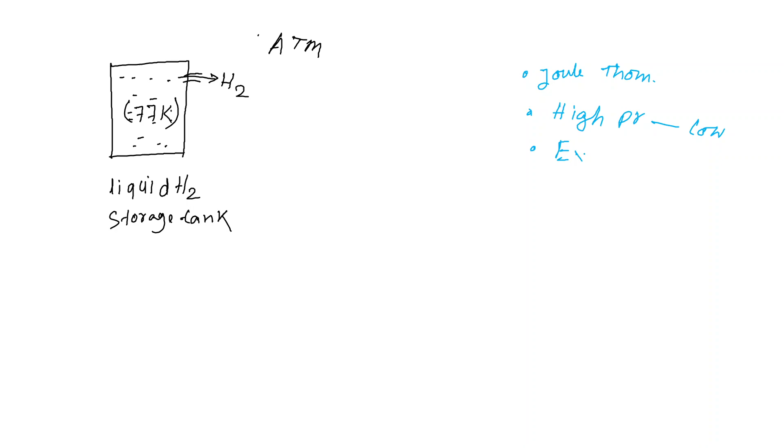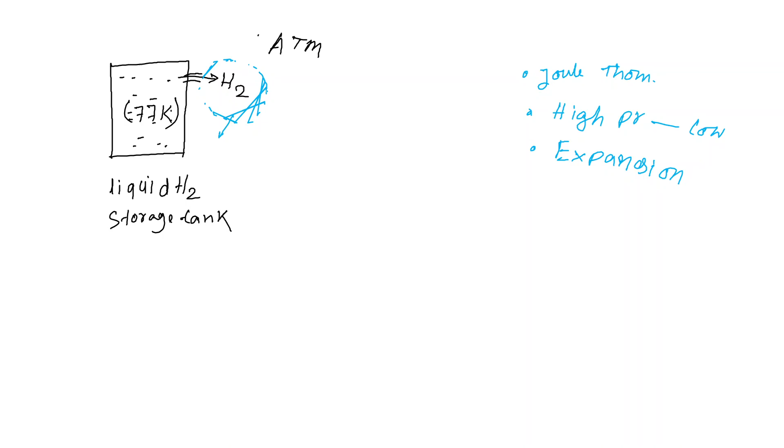Expansion of the hydrogen gas will be very high. This means that firstly a cloud of liquid hydrogen will form. This will be in liquid condition, and when exposed to atmospheric conditions, this liquid will convert into gas.

The hydrogen gas at 300 Kelvin, or 298 Kelvin atmospheric conditions, will expand into a very larger volume. And how much larger? Can you calculate how much larger the volume will be?

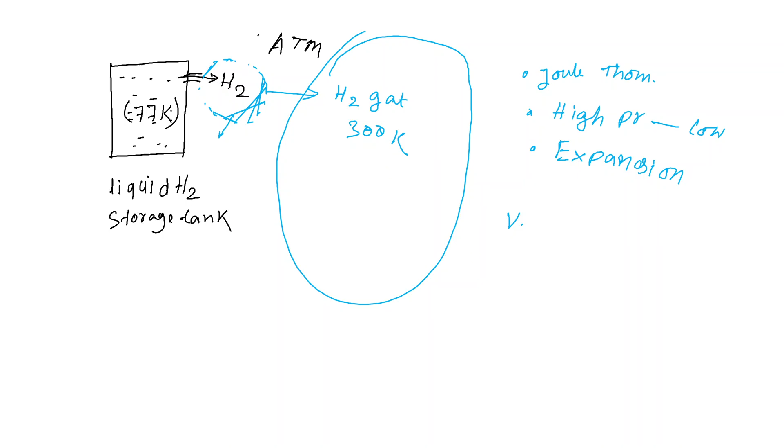If we take V as the volume of the hydrogen, suppose volume of the hydrogen liquid to gas volume of the hydrogen in gaseous condition at atmospheric, 1 atm. What was the volume for 1 kg of hydrogen?

Suppose 1 kg of hydrogen has leaked. So what was the volume of the liquid hydrogen? Yes, 14 liter. 14 liter means 14 liter. And the gaseous volume at NTP...

It was NTP, about 11,030 to 11,240 liter. So, suppose 1 kg hydrogen gas has leaked from this container. This 1 kg of hydrogen, when it comes to atmospheric conditions, will occupy 14 liter of space as liquid, and when it converts into gas, it will occupy 11,240 liter of space. That means 11 meter cube. So it is a very large volume.

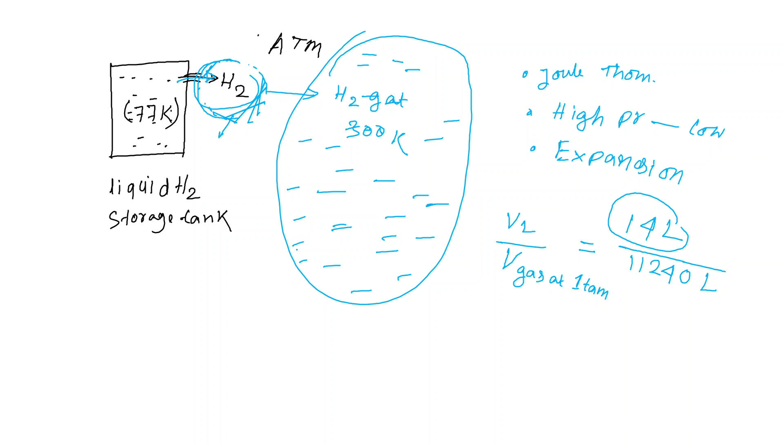Question number 2: calculate the work done to compress 1 kg hydrogen from 1 bar to 16 bar isentropically, assuming hydrogen as an ideal gas. If the compression is done as two-stage compression from 1 to 9, then 9 to 16. In the first case, you have to calculate the isentropic hydrogen compressor work done.

So what is the isentropic work done formula? The isentropic work done formula is gamma divided by gamma minus 1, into R, into T, multiplied by the bracket: final pressure P2 divided by P1 to the power gamma minus 1 divided by gamma, minus 1. This is for your better understanding.

If you put in the values for the first question, 1 kg of hydrogen, 1 bar to 16 bar - so P1 will be 1 bar, and P2 will be 16 bar. Taking gamma for hydrogen, since it is diatomic, gamma will be 1.4, and R equals to 8.314.

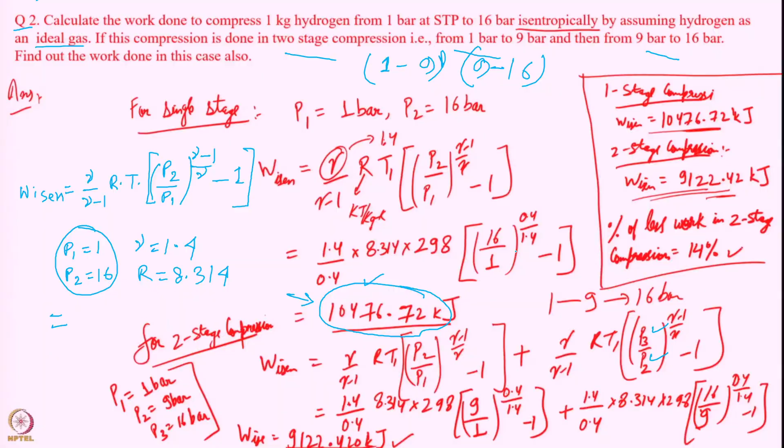Okay, this is the question. Another question is very simple. Question number 3: calculate the work done to compress 1 kg hydrogen isothermally. Previous questions were isentropic compression; now this is isothermal compression.

The final volume is reduced to one fourth of the initial volume. Suppose final volume V2 is one fourth of the initial volume, so V1 equals 4 V2. Temperature is 298, R equals 8.314 kilojoule per kg Kelvin mole. As it is in kg, it is not mole - this unit is also correct.

Okay, so isothermal work done equals to, isothermal work done formula is RT ln V2 divided by V1. So you know the R value, you know the T value, V2 value, you know the V1 value. I mean, in the case of the V2, you just keep the V2, or V1 in place of the V1 for V2.